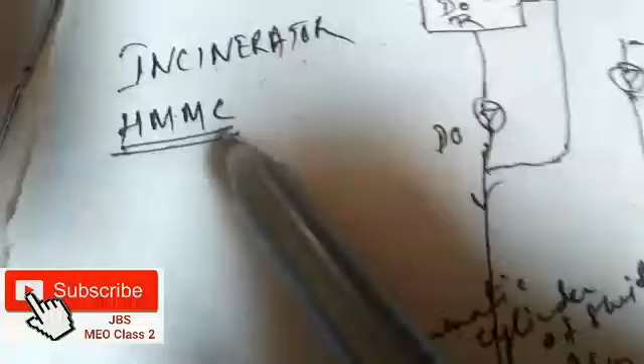So friends, today we'll be discussing the incinerator, and the incinerator which I'll be talking about is from HMMC, Hyundai Marine Machinery Corporation. So let us see the basic functioning of this incinerator.

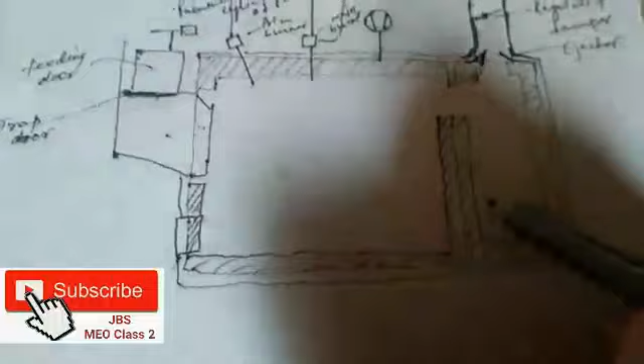Now this is the primary chamber of the incinerator, and this is the secondary chamber, and there is a refractory wall between both the chambers. And friends, this is the primary burner, and this is the main burner which will burn the sludge oil, and this is the primary blower. The atomizing air for the main burner will be supplied by this primary blower.

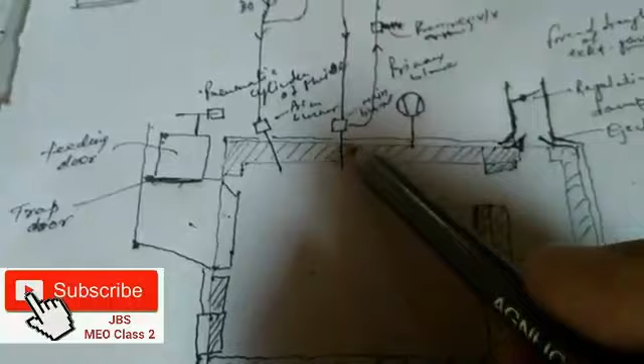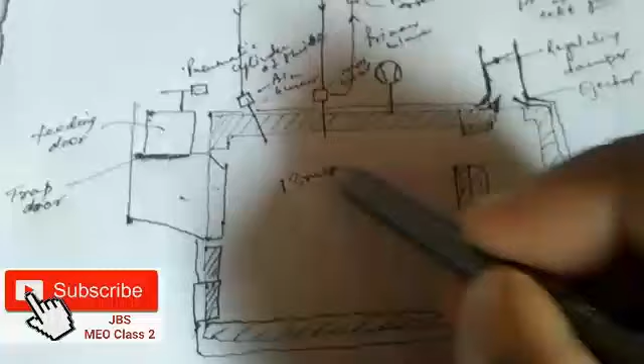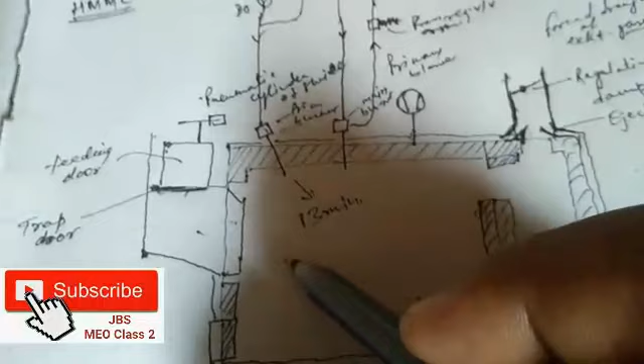So actually what happens here is that initially the diesel oil will be supplied by the primary burner. For 15 minutes this primary burner will be running on diesel oil, and when the temperature of the primary chamber will rise to approx 700 degrees C, the main burner will come into action. The main burner purpose is to supply the sludge oil or the waste oil from the waste oil tank.

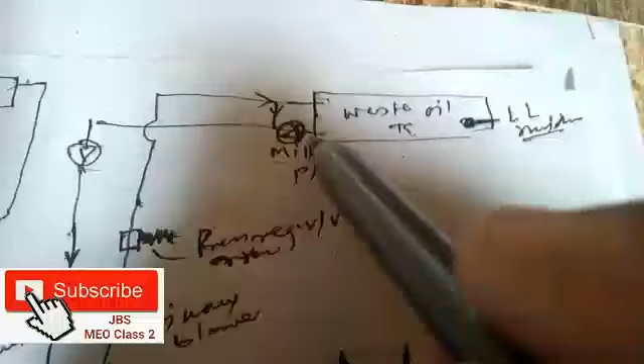Now friends, let us see what is there in the waste oil tank. In the waste oil tank we have a mill pump, and the location of this mill pump is actually 150 mm below the low level switch. So if this is the float for the low level switch for the waste oil tank, then this mill pump suction will be 150 mm below this low level switch.

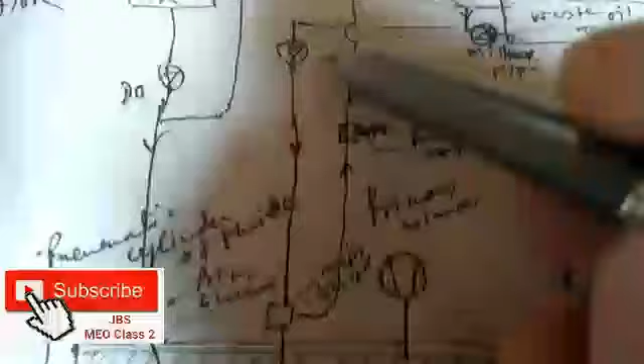The main purpose is that it will churn out whatever sludge gets accumulated at the bottom due to gravity, and it will supply it to the main burner pump, and from here it will go to the main burner. And also this line has a steam tracing line running along with the piping of this main sludge oil line. So this is the main burner.

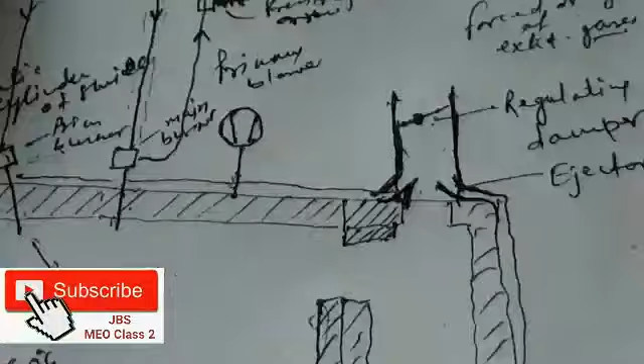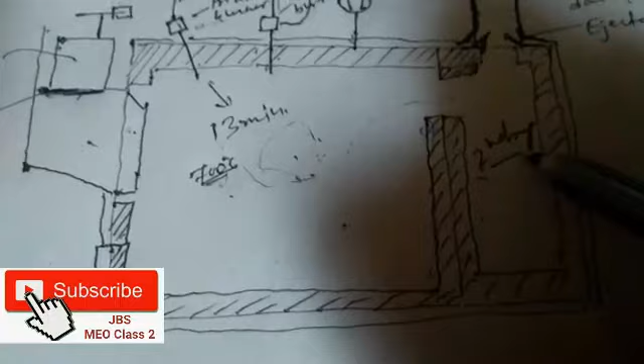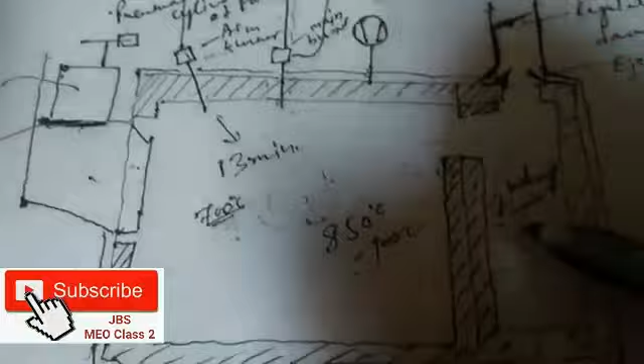Now friend, this is the regulating damper at the exhaust. First the sludge oil will be burning here in the primary chamber, and whatever uncombustible gases are there will pass from here to the secondary chamber. When the main burner is running, the temperature of the primary chamber will be approx 850 degrees C to 900 degrees C, and the uncombustible gases will further burn in the secondary chamber, and after that pass through the regulating damper to the exhaust.

And actually the purpose of the regulating damper is very important. We must know that here one portion called the ejector is there. The main purpose is that we want the primary chamber as well as the secondary chamber, mainly the primary chamber, under vacuum. In such type of incinerators we will have a U-tube manometer on the front. One end is exposed to the atmosphere, and the other end is connected here. This is the refractory, then the first cladding, and after that there is a metal cladding, and this is actually a free space for the air.

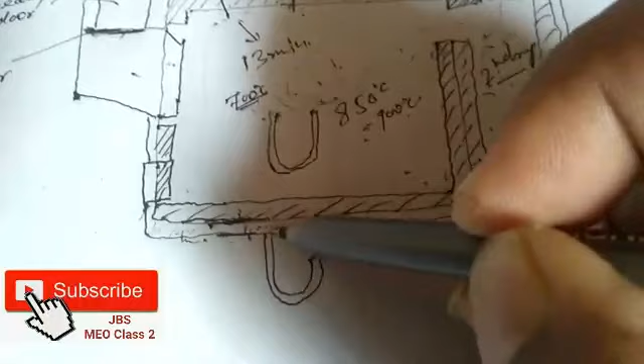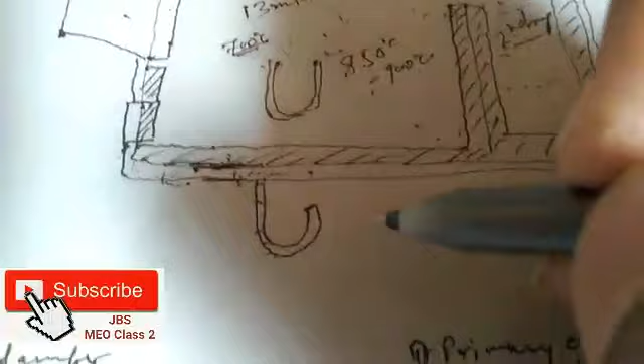Now this end is actually connected here, like this. See, this is the U-tube manometer. This is connected here, and we have to maintain a negative pressure in this primary chamber. The main purpose of the negative pressure in the primary chamber is so that no flame or exhaust gases will come out of the chamber. So how is this possible? This we are achieving through this ejector. As you are seeing, there is another chamber out here.

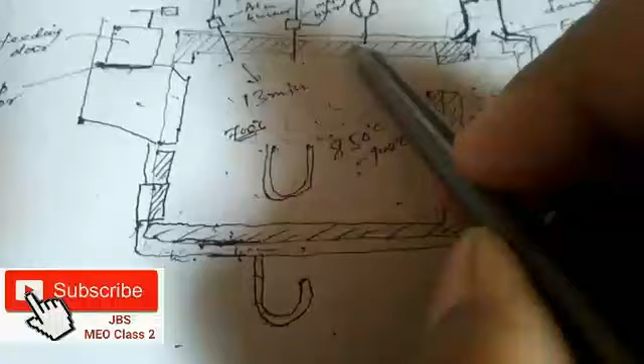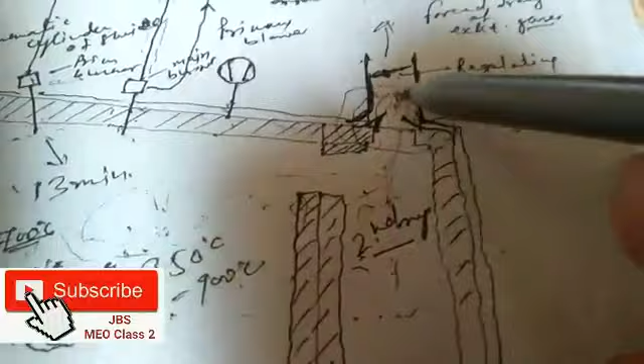This is the air being supplied here for the cooling of this outer chamber, plus the exhaust gases which run out from here. The forced draft of this exhaust gas is very high, and because of that a low pressure is being created over here, similar to what we experience in the Venturi effect.

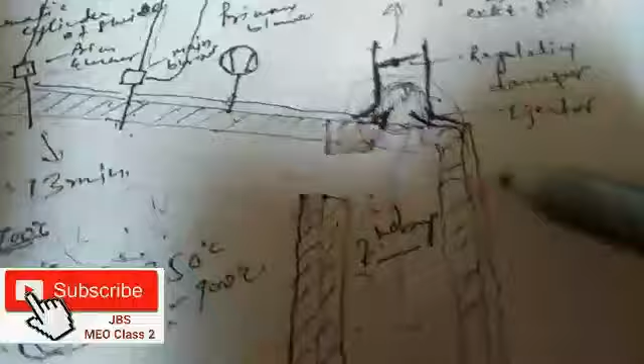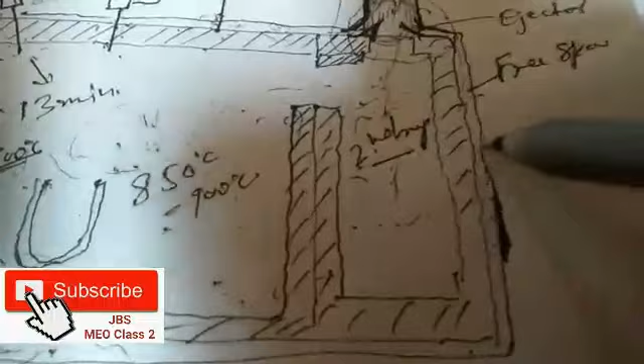So here also a low pressure zone is created, and it will try to take all air out from this free space. This is the free space. So what we are seeing here is that the primary blower supplies air for the main burner, plus the free space, and the outer cladding of the incinerator, so it is cooling this also, and this is the refractory.

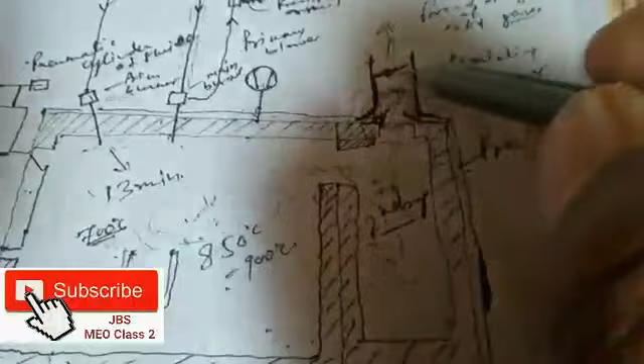Also, due to the forced draft of the exhaust, the burnt gases from the primary chamber pass through the secondary chamber, and from here through the regulating damper. We can regulate the flow of the exhaust gases through the regulating damper. So we can increase the back pressure, or we can decrease the back pressure. When we decrease the back pressure, we are creating a low pressure here.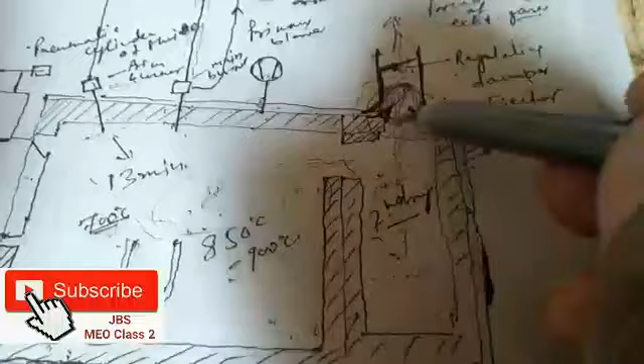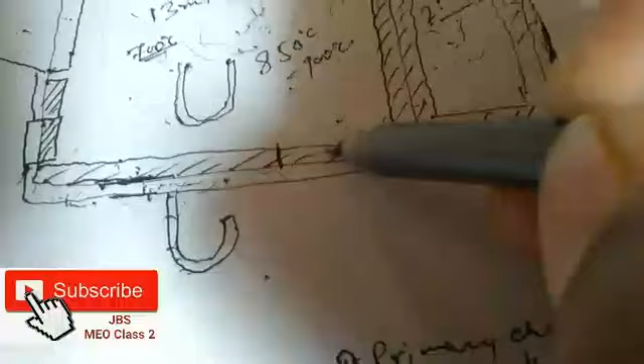Because of the low pressure, a vacuum is being created over here. So it will suck the air in the free space, and finally there will be a negative pressure developed inside this. There are very small holes, and it will try to maintain a negative pressure inside this chamber also. So finally we have to maintain a negative pressure of 50 mm of water gauge.

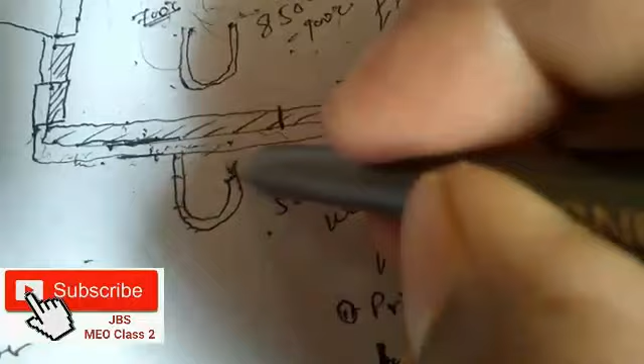So we are filling water in this U-tube manometer, and over time we are just maintaining a level in it. Whenever it gets empty or dries out, we'll fill it with water. So this is the basic concept, a very important point which most videos have not covered, so I've tried to cover it.

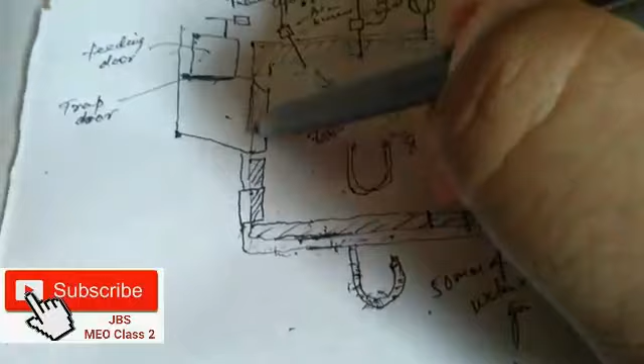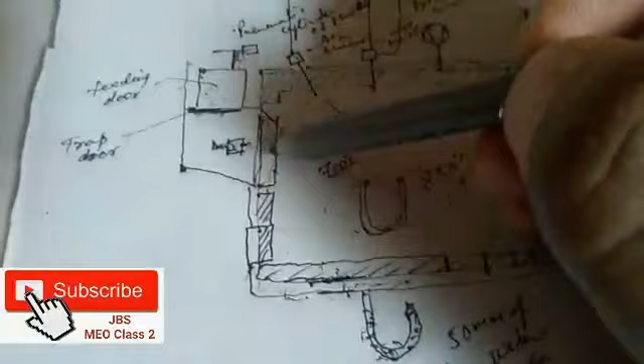So friends, this is the feeding door, and this is the sluice gate. We operate this sluice gate through the pneumatic cylinder. This is the pneumatic cylinder, and here a micro switch will be there. So when this feeding door is open and this sluice door is open during starting, the primary burner will not fire.

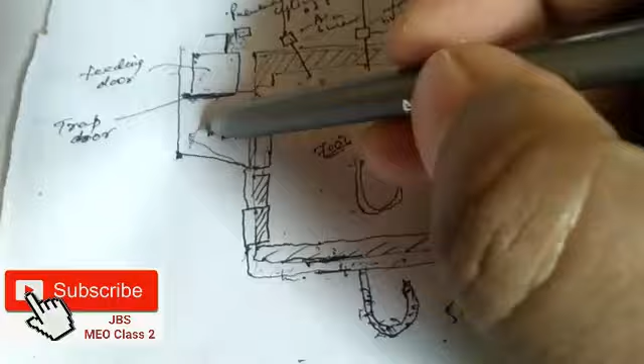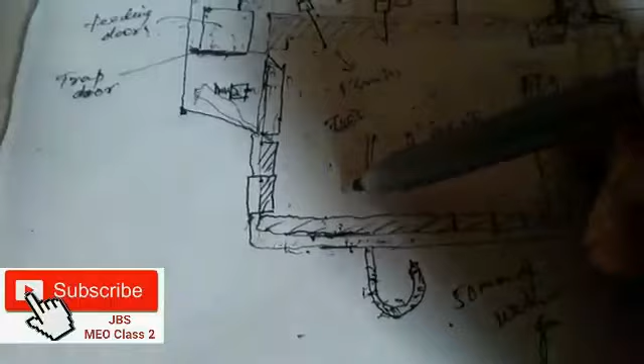For working of this portion, through the button you operate this pneumatic cylinder, which will open this sluice door, and whatever waste you have fed through the feeding door will go inside the primary chamber. After that you can shut it. When it gets closed, this micro switch gives a signal that the door is closed, and we can start the incinerator, and the primary burner will fire.

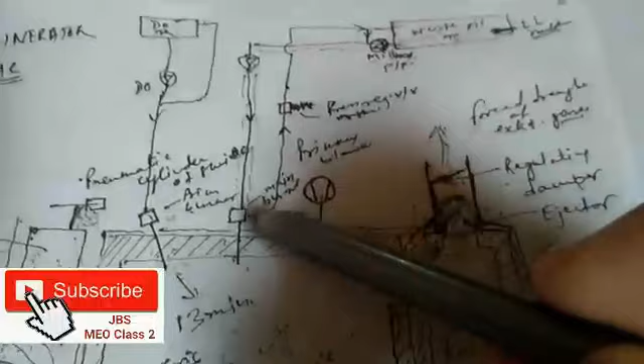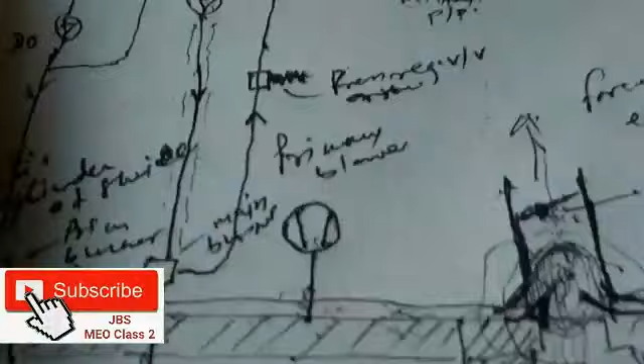Now friend, the oil from the main burner returns to the waste oil tank, plus at the discharge of the mill pump we also have this connection here. Also, how much sludge oil is fed into the primary chamber we can control through the pressure regulating valve here in the return line.

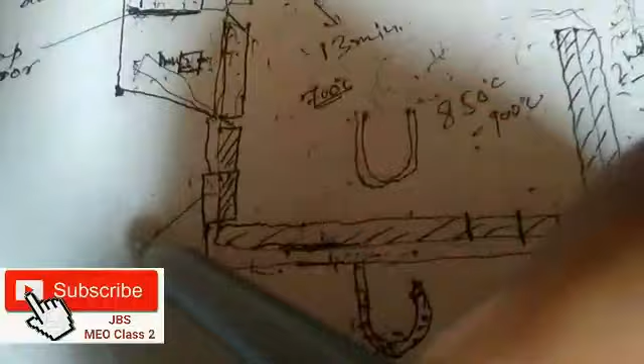See, this is the door at the bottom. We can open this door to remove the ashes left over here after burning the solid waste. So this door can be opened and we can remove